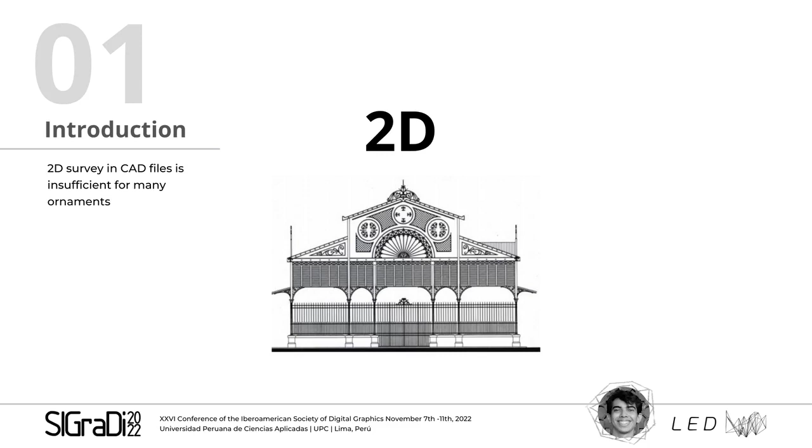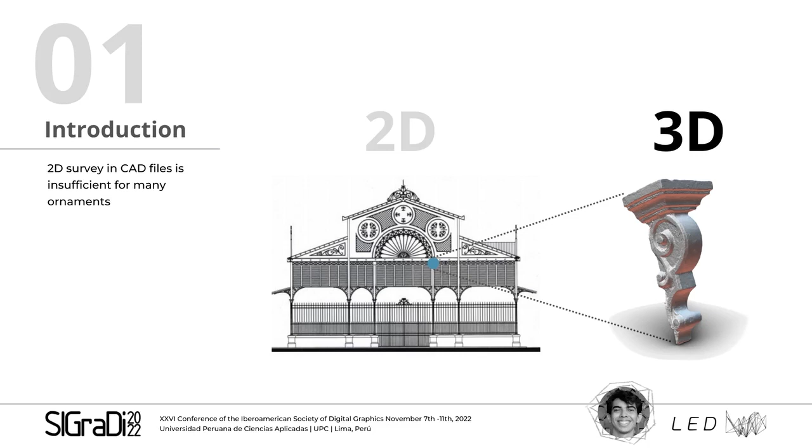However, the use of traditional techniques, based on the direct acquisition of key measurements with analog tools to produce 2D drawings, makes the documentation process time-consuming, imprecise, and often inadequate for recording complex forms. On the other hand, the growing scarcity in the availability of craftsmen specialized in interpreting and producing artifacts from these representations raises suspicions about the suitability of this type of record to allow future reconstitutions of damaged parts, an action common to restoration processes. This is a crucial point, since the goal of the restoration process is to preserve and reveal the aesthetic and historical value of the monument, and should be based on the original materiality and authentic documents. It must cease in the moment the conjecture begins.

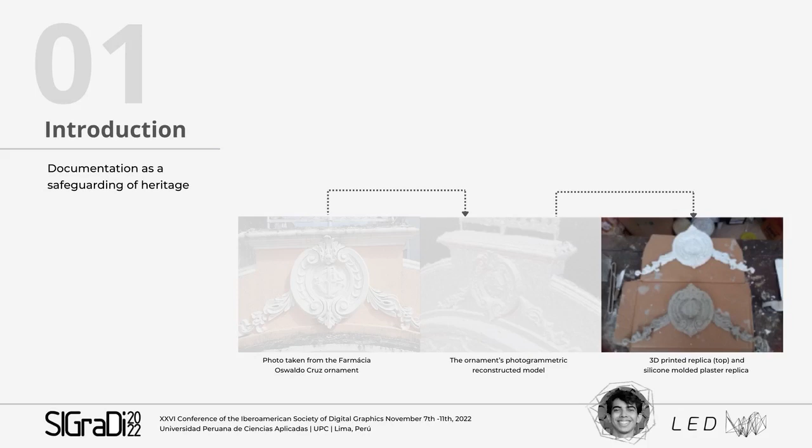In this context, digital information and communication technologies, DICTs, such as photogrammetry and digital fabrication, present the possibility of improving the way the documentation of cultural heritage is carried out, allowing the creation of methodologies based on non-intrusive techniques that do not damage the object to be documented. This work focuses on the use of digital reconstructions using dense stereo matching, DSM photogrammetry, as a capture method, selected for being the most accessible, having as a minimum requirement only the possession of a camera and a computer

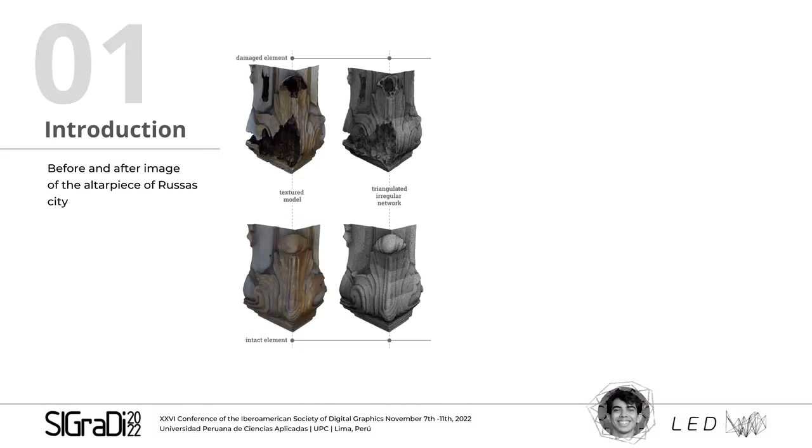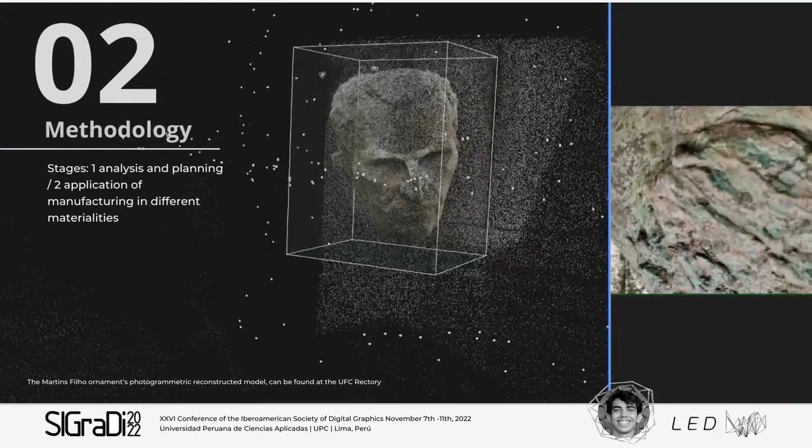equipped with some software. The objective of this work is the development of a methodology to operationalize the documentation of elements of high geometric complexity, common to the stylistic groups of the built cultural heritage that permeate the context of Fortaleza, Ceará, Brazil. The design of such a methodology is so that it can be used in the restoration process. The development approach for this work was divided into two stages. The first stage of analysis and planning starts from the identification of the problem in the present paradigm of documentation of the built heritage, expressing the difficulty of transposing geometric information in the restoration processes.

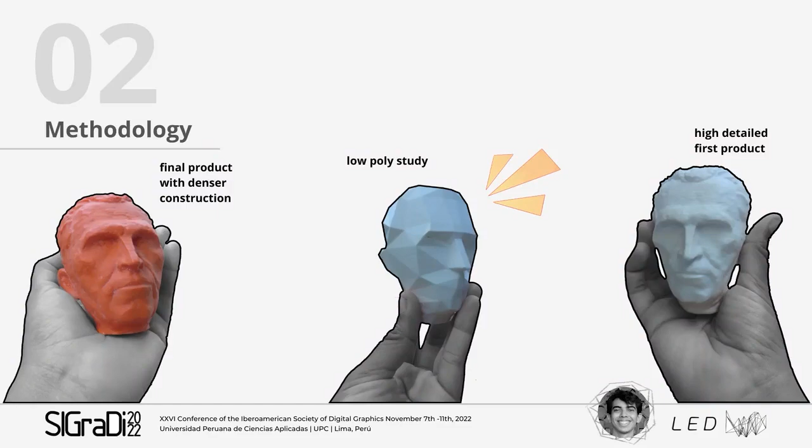For this, photogrammetric capture and digital fabrication processes are incorporated to complementary fabrication processes, aiming at the reconstruction of distinct materialities. The second stage seeks to validate the workflow propositions raised in the first, observing the feasibility of the application of these models in a local context, producing a series of prototypes in different materialities to evaluate different manufacture techniques, observe the difficulties and potentialities of the processes, and record the results.

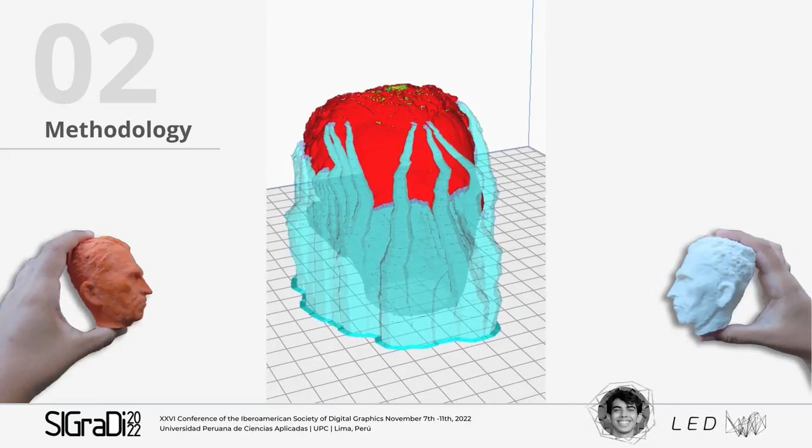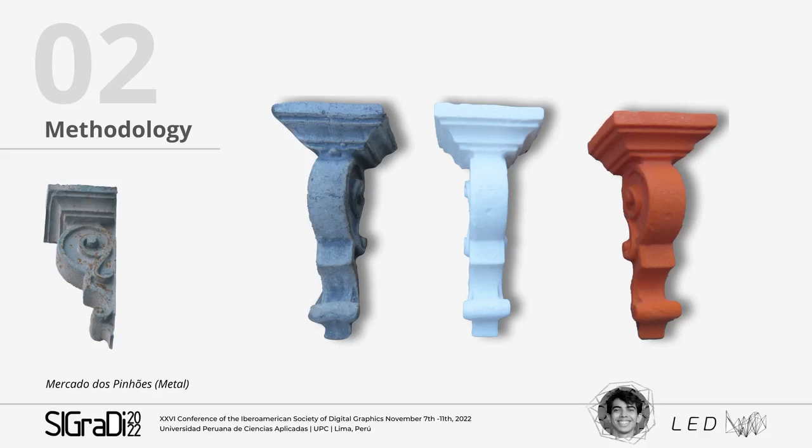Observing the particularities of the analyzed processes and the selected tooling, it was possible to outline a standard workflow for the production of physical reproductions of ornaments from digital models. Besides obtaining the digital data, the process includes the reconstruction of the ornaments via digital fabrication, seeking to close a cycle of restoration steps for heritage assets so as to ensure a greater permanence for built cultural systems.

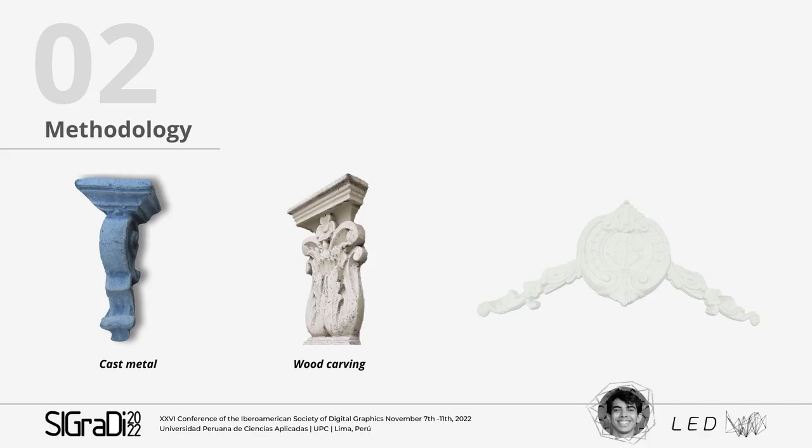Observing the samples documented in the field, we sought to categorize them into common criteria related to different materialities present in the ornaments of the included buildings. The categories that were considered as the focus of the scope of this work were cast metal, wood carving, and plaster. This classification has direct correlation to the manufacturing methods employed. The techniques involved in the manufacturing processes most common to the different ornament materialities observed are mapped in a flow chart where one can more clearly observe each step involved in referring to each materiality.

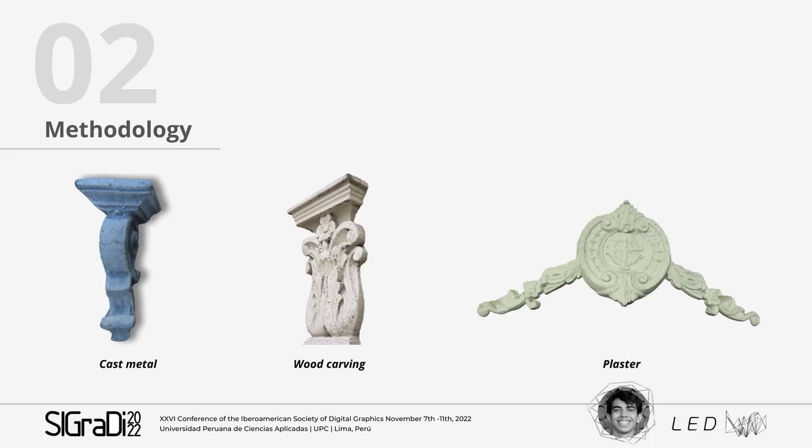To this flowchart is incorporated a device composed of a group of steps that range from the capture and digitalization of the ornament's shape using photogrammetry techniques to its rematerialization using digital fabrication techniques. Photogrammetry using DSM was the primary technique used in the process of digitally capturing and reconstructing the artifacts. It operates by taking a collection of photographs taken from various angles of the target object as input and identifying correlations between groups of homologous pixels present in the provided photographs.

The photos in different perspectives of the same object allow the comparative processing algorithm to spatialize the correlated pixels as points projected into Cartesian space. This aggregate of pixels is referred to as a point cloud. According to Groetelaars, the process of generating point clouds with the DSM technique can be divided into 5 main steps. The first, photo input. Second, automatic correlation of the photos. Third, reconstruction of the preliminary geometry of the object and camera. Fourth, dense association of homologous pixels.

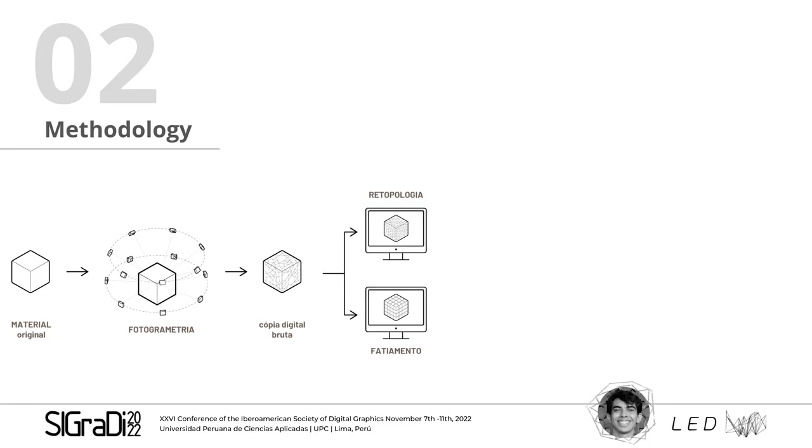Fifth, creation of the geometric model as a point cloud and the triangulated irregular network, TIN mesh, which is a mesh of non-rectified triangles generated from the association of the vertices generated by the point cloud, which may be textured or not. Given this process, the generated geometry is often over-detailed. When that's the case, the process of remeshing comes as an optional step, enabling the creation of a simplified version of the 3D model, reducing the numbers of faces of the mesh while retaining as much detail as possible.

Acquiring a 3D model of the artifact allows for its use as a digital blueprint in processes of additive and subtractive manufacturing. Computer-aided design to computer-aided manufacture software, CAD to CAM, can interpret the input geometry and output a series of machine-specific tool-path commands. This process is also known as slicing. These are known as G-code. Computer numerical control (CNC) machines, such as CNC routers and 3D printers, can receive G-code as input to produce physical prototypes of the original geometry.

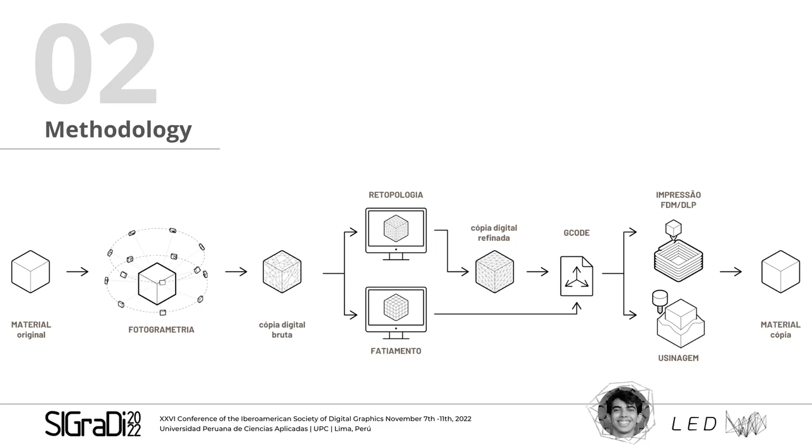These digital processes were grouped and considered as a minor workflow path that allows for the translation of the artifact's shape through different materialities. Having all steps laid out, the digital processes together with the physical processes to produce replicas for the three materialities considered, possible workflows were elaborated in which the end goal was taking advantage of the digital device in the process of translating the artifact's shape from its original medium to a replica of the same materiality.

To validate the device elaborated by the merging of those previous workflows, a number of case studies were elaborated where a chosen sample of each kind of materiality would be subject to a series of processes mapped by this device, wherein the goal is that the workflow meets two conditions. First, the artifact is documented and replicated by the digital processes. Second, the final replica reaches the same category of materiality as the original one.

Limitations on the methods of fabrication available restricted the digitally manufactured replicas to be made mainly of polymers, polystyrene, and wood. This means that to reach the end product, additional processes would need to be included in order to transpose the artifact shape to its proper final materiality.

Wood. The chosen ornament for this case study was carved on the main axis wood door from the Teatro José de Alencar that leads to the metallic internal structure of the theater. It is situated in Fortaleza, the state capital of Ceará, in Brazil. As for the ornament which was worked on in this step, the last segment of the construction was the settlement of the carpentry and frames by the end of 1909. Most of the details are still preserved as the building has gone through some restorations.

The photogrammetry process sampled 45 photographs taken by a 12-megapixel cell phone camera, given the occasional absence of a professional one. The models were generated using Epic Games Reality Capture version 1.2. The results turned out convincingly similar to other captures, with minimal artifacts, and model cleanup was done separately in Blender.

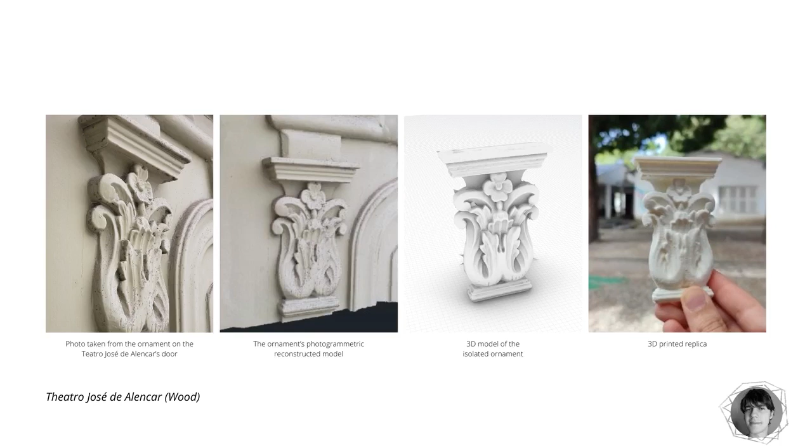A physical prototype was fabricated using 3D printing with ABS polymer at 1 to 2.5 scale. So far, the wooden prototype has not been manufactured yet.

Metal. The Mercado dos Pinhões is a market building with a metal structure, registered as protected cultural heritage by the municipality of Fortaleza by Decree 12368 of March 31, 2008. The ornament chosen is on the facade of the Mercado dos Pinhões, on the top of the pillars outside the building.

The photogrammetry process sampled 37 6-megapixel photographs, and models were generated using 3 different software: Agisoft Photoscan, Autodesk Recap, and Autodesk Remake. Model cleanup was done separately in Autodesk Mesh Mixer.

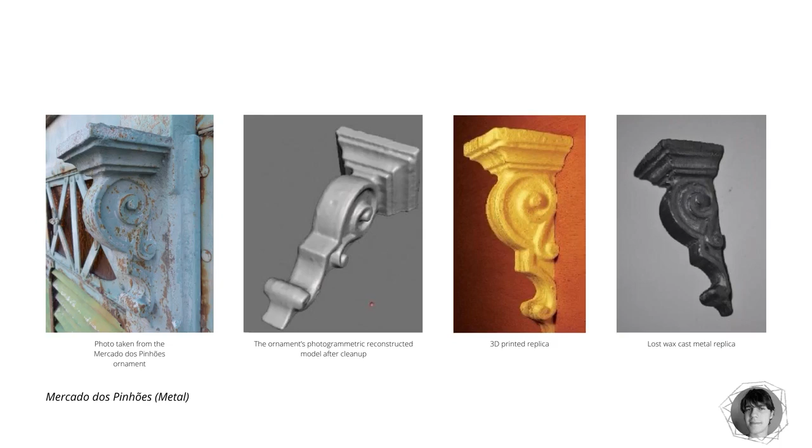Physical prototypes were fabricated using 3D printing with PLA polymer and CNC milling using styrofoam, wax, and MDF. The 3D printed prototype was later used to produce a silicone mold to make wax copies. The final metallic piece was produced using lost wax casting using a mold in 1 to 2 scale.

Plaster. The chosen ornament was the crowning of the facade, whose hard-to-reach position above the first floor presented a good testing opportunity for using drones as a photographic capture tool. The photogrammetry process sampled 2 sets of photographs, with 180 photos and 257 photos, sampled from 4K 60fps videos taken by a DJI Phantom 4 Pro drone equipped with a 20-megapixel camera.

The 3D model was generated using Reality Capture version 1.2. The original model captured most of the building facade and had approximately 26.3 million triangles. This model had some surface noise and its size wasn't handy, so it was cropped, smoothed, and remeshed into 4 different versions, with 3 million triangles, 1 million triangles, 100,000 triangles, and 10,000 triangles each.

The 1 million triangles model was chosen for prototyping since it was the one with less geometry that still maintained most detail. The ornament was isolated from the model using Boolean operations in Blender and exported for slicing. Physical prototypes were fabricated using 3D printing with PLA and ABS polymers, and CNC milling using Styrofoam and XPS. The 3D printed ABS copy was later used to produce a silicone mold to make plaster copies.

The main issues found through this case study were: the photogrammetric reconstruction generated surface noises that affected the physical accuracy of the model. It's unclear if the photo sampling hasn't covered enough angles, or if the photos taken by the drone while moving had motion artifacts.

FDM printing generated stringing on the printed piece. This can happen especially when printing ABS and PETG. This can negatively affect molding processes and make cleanup time-consuming. The silicone molding was inconsistent, which made artifacts that could affect the final piece.

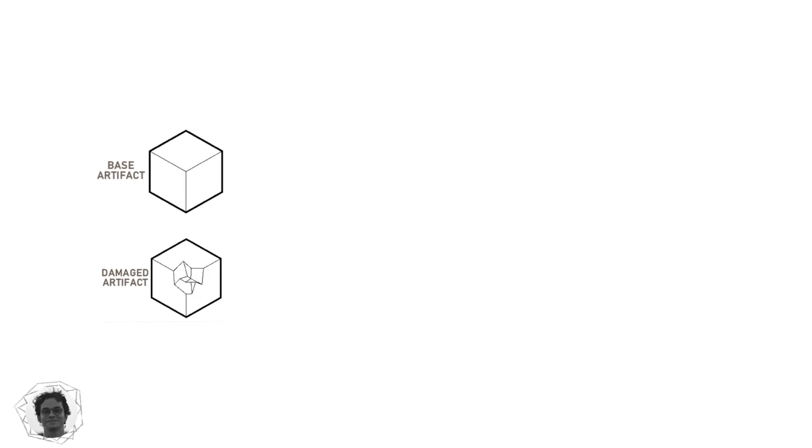The main possibility explored with the incorporation of the process in this research was the manipulation of obtained 3D models as visual aids, or in the process of fabricating physical prostheses to be used in restoration projects. Experiments in producing these prostheses often rely on the presence of symmetry and repetition in the documented artifact. This way, speculation on the original shape of the ornament is more easily avoided, and a 3D model can be produced using a model of a damaged area and an undamaged one.

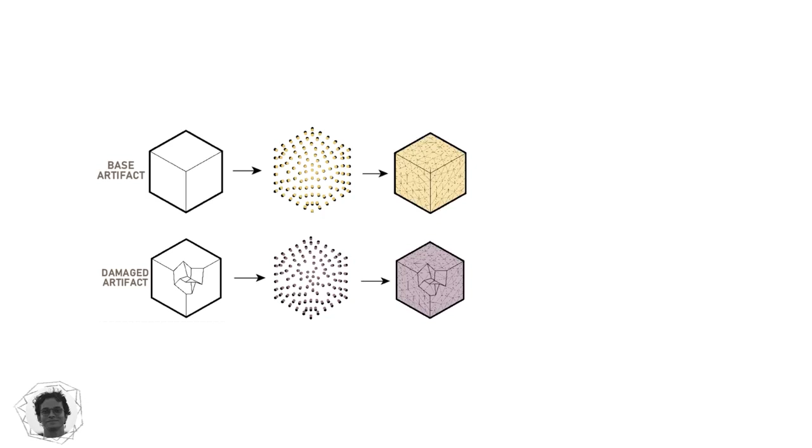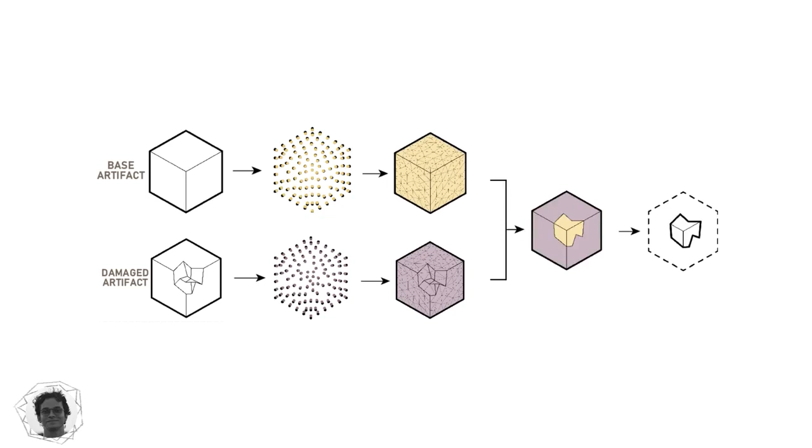A Boolean difference operation could be performed, where a digital model acts as a geometric operator, detecting another model that intersects with its geometry. This process generates a fragment based on the reference model, which fills the negative space of the model.

A workflow such as the one described in this work, encompassing many different processes and tools, is bound to have results of varying qualities and serves mostly as a general guideline through the steps available. Its exploration, however, opens a path to the qualitative evaluation of the techniques and tools available, as well as different work paths pertaining to the recording and replicating of built cultural heritage.